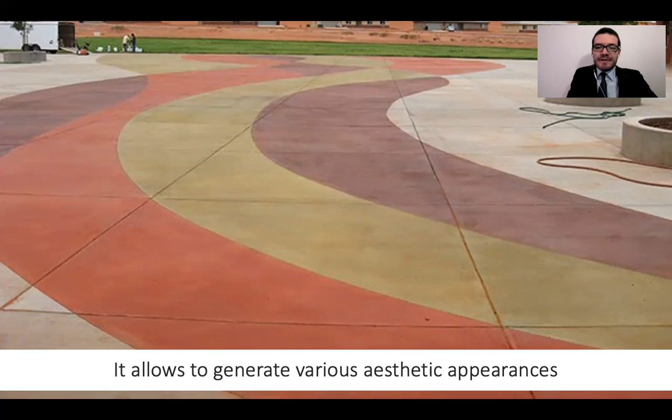Now, I want to share some advances and developments of concrete which will serve us in the post-COVID-19 pandemic situation. First, the fast track. Fast track is an appropriate technology for rehabilitation and reinforcement of pavements. The principal characteristic is that we can reduce the traffic disruption. So we have many applications in airport runways, access to homes, urban and rural roads, intersections, parking bays, etc.

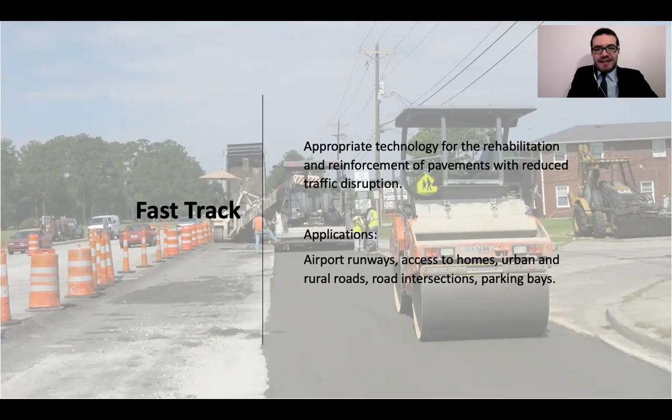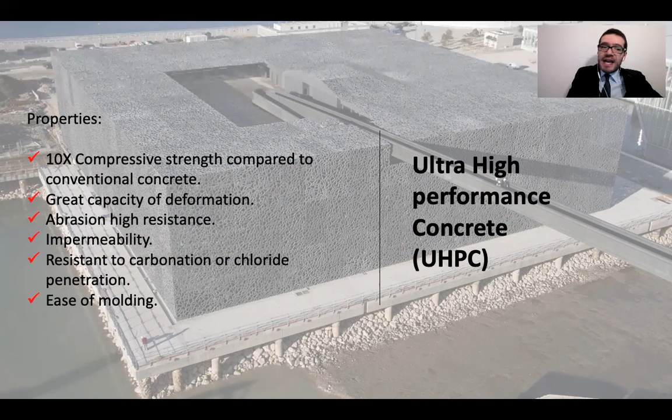Second is the ultra-high performance concrete. The compressive strength of this type of concrete is about 10 times that of conventional concrete. It's a very, very high compressive strength. It has a great capacity of deformation, high resistance to abrasion, high impermeability, high resistance to carbonation or chloride penetration, and is easy to mold.

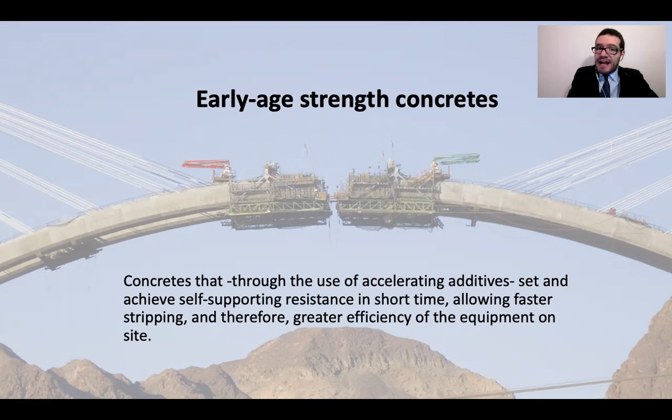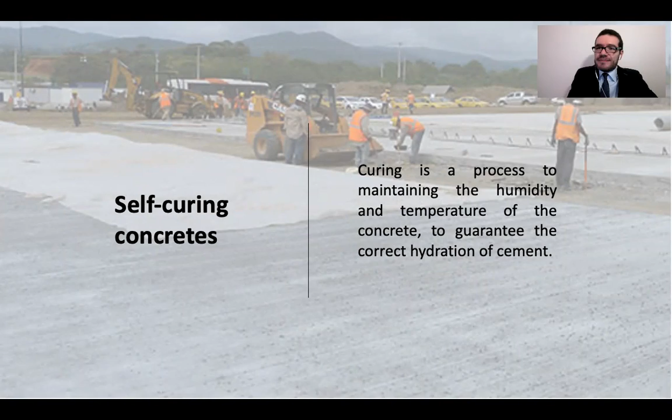Another concrete is the self-curing concrete. Curing is a process to maintain the humidity and the temperature of the concrete to guarantee the correct hydration of cement. Some problems from inadequate curing are concrete with lower compressive strength, plastic cracking, crazing, and of course, less durability. Self-curing concrete absorbs water from the air, and this is a common way we can solve the problem caused by a lack of curing.

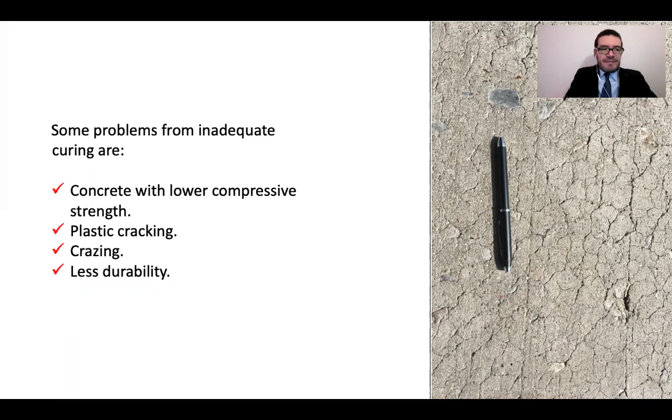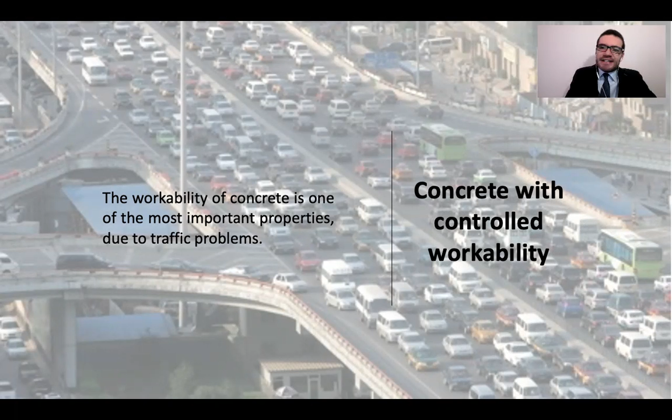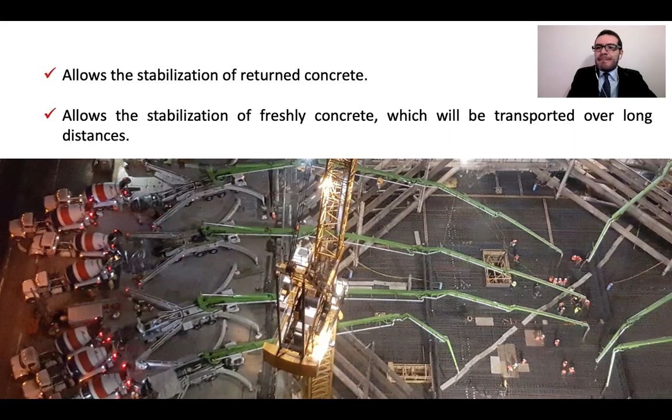Another type of concrete is the concrete with controlled workability. The workability of concrete is one of the most important properties, and due to the traffic problems at this time, it's more important. The workability controlled concrete allows the stabilization of return concrete and allows the stabilization of fresh concrete so that we can transport it over long distances.

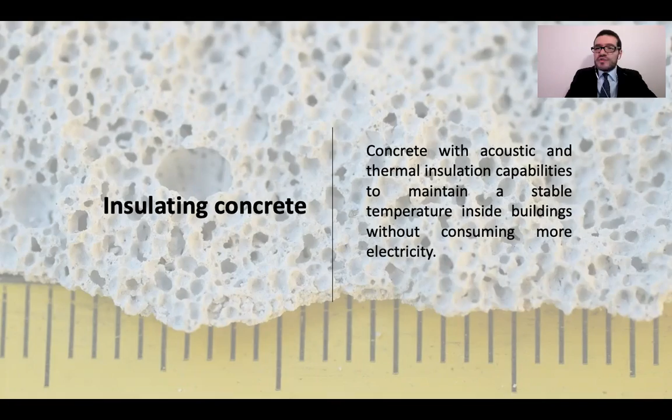Another type of concrete is the insulating concrete. Concrete with acoustic and thermal insulation capabilities is widely used to maintain a stable temperature inside buildings without consuming more electricity. This is very important in modern times, thinking of sustainability. We can make insulating concrete with the intentional inclusion of high air content and the use of extremely light aggregates like rhyolite or polystyrene.

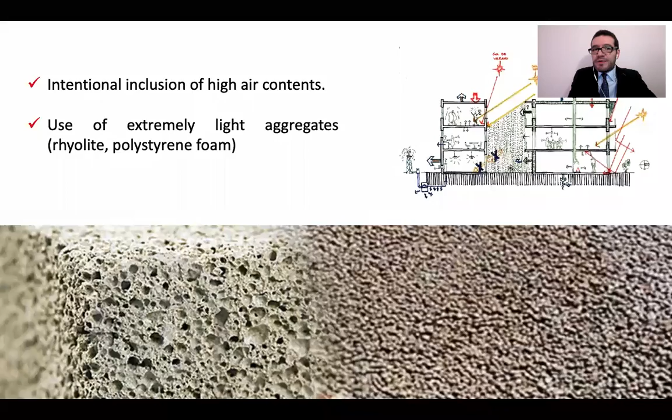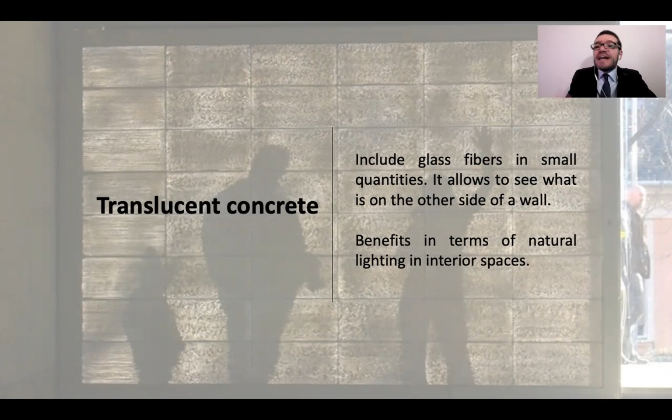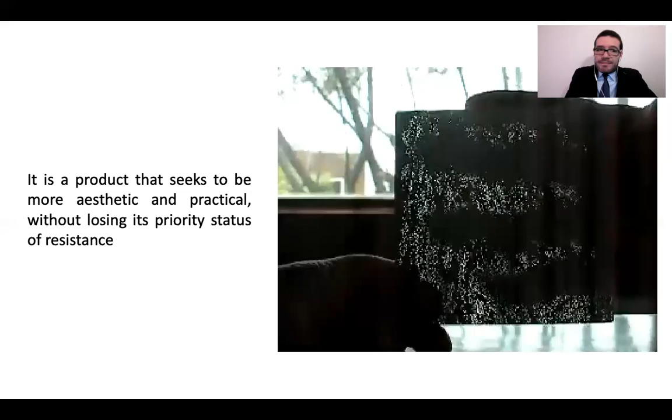Translucent concrete. Translucent concrete includes glass fiber in small quantities. It allows you to see what is on the other side of a wall and has some benefits in terms of natural lighting in interior spaces. It's a product that seeks to be more aesthetic and practical, but it has an important resistance, which is one of the principal properties of concrete. In the video, you see a short application of translucent concrete.

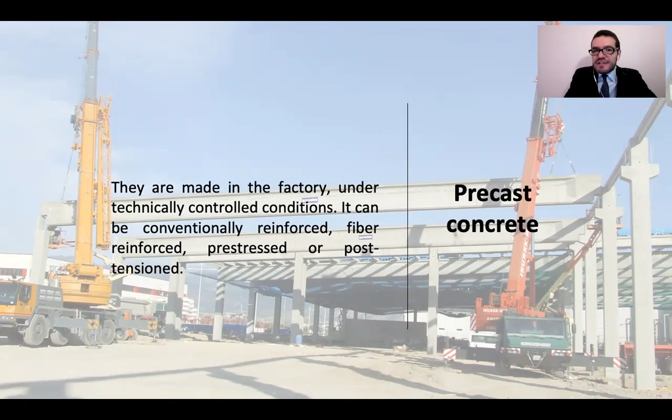Precast concrete. We have been using this material for many years, but thinking post-COVID-19, we can apply precast concrete because it is made in a factory under technically controlled conditions. It can be conventionally reinforced, fiber reinforced, pre-stressed or post-tensioned. We can precast many elements: beams, girders, columns, piers, piles, slabs, walls, etc.

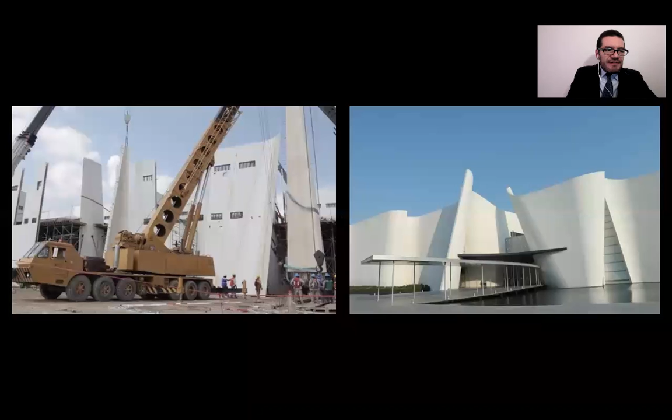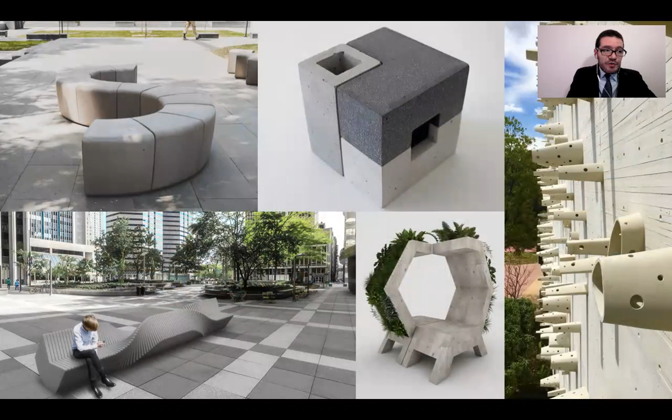In this picture, you see the International Museum of the Baroque in Mexico, designed by Toyo Ito. It's a totally precast building, and it's a very beautiful construction. And also, any decorative element or urban furniture may be precast. In the picture, you see different applications.

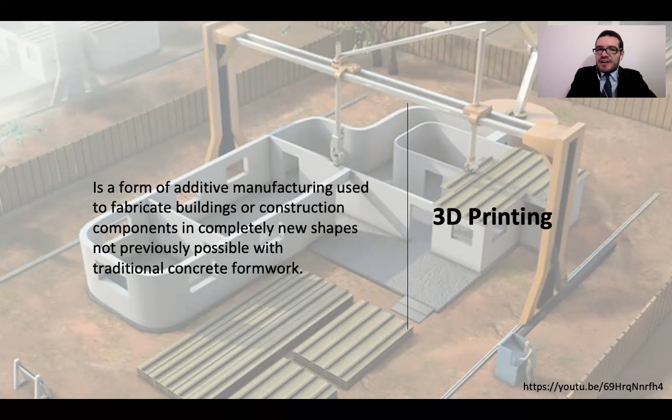And finally, I want to talk about 3D printing. 3D printing is a form of additive manufacturing used to fabricate buildings or construction components with completely new shapes, not previously possible with traditional concrete formwork. I want to share with you a short video of 3D printing.

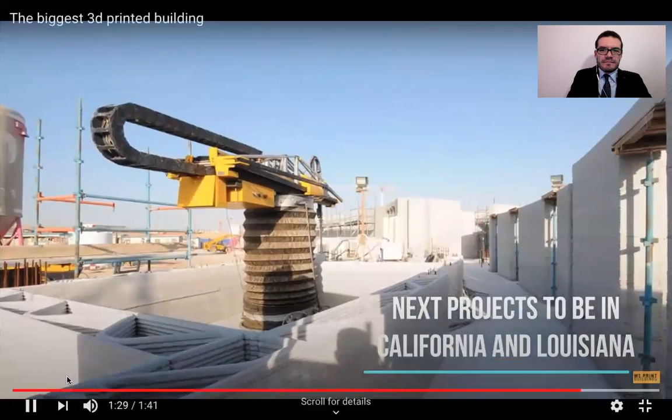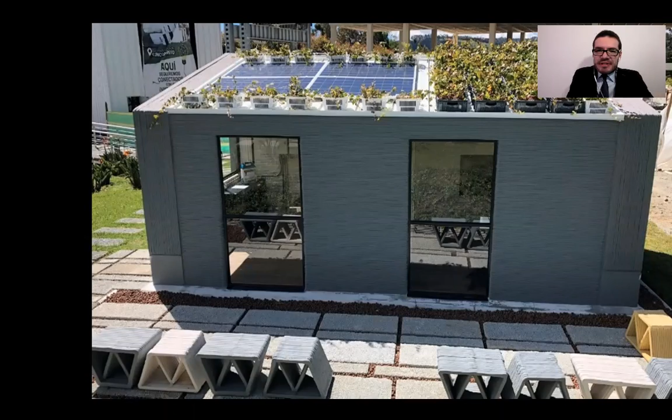This is an application of 3D printed concrete in Colombia, a little house, and other little applications.